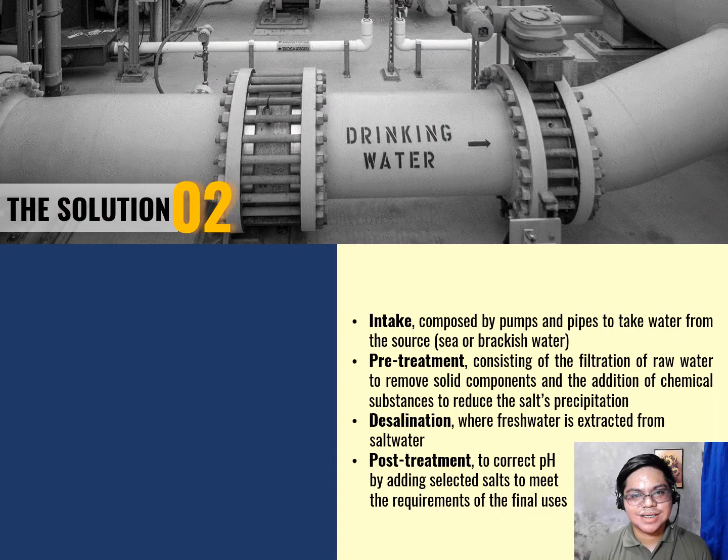Accepting this reality, unconventional water technology, primarily seawater desalination, has been declared to support the United Nations Sustainable Development Goals, particularly Goal 6, which is about ensuring availability and sustainable management of water resources and sanitation for all. In this light, desalination is a reliable solution to the shortage of potable water that is happening across the globe.

Seawater, which is highly saline, has a salt concentration of 35 grams per liter, which is not suitable for drinking purposes and a wide array of other uses. So the increase in the demand for potable water and the shortage of surface water led to the development of these desalination technologies to obtain fresh water from seawater, or brackish water, which can also be a water source.

Okay. Denotatively, desalination describes any process that removes excess salt and other minerals from water. A desalination plant normally includes first the intake, which is composed of pumps and pipes to take water from the source. Again, sources could be seawater or brackish water. And then the pre-treatment processes. We have conventional pretreatment processes, and we also have more modern technologies for pretreatment.

So for the conventional type, we have coagulation, flocculation, and such. And for the modern type, we now have an emerging membrane-based technology, which I will be further discussing in the latter part of this presentation. But all these pre-treatment processes aim to remove solid components, and we'll also be adding some chemicals in order to hinder salt precipitation.

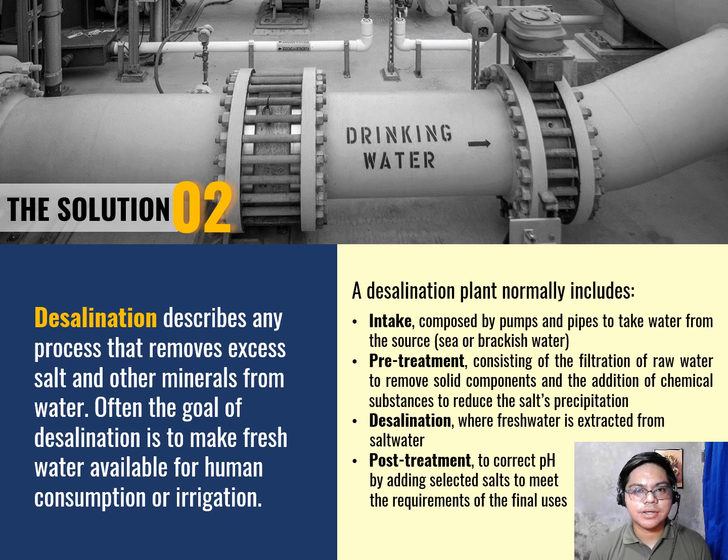Well, historically, the idea behind the desalination process was introduced by the Royal Navy in the 18th century, with the purpose of increasing navigational autonomy without storing more water on the ships. It was then in 1907 that a Dutch company installed the first desalination plant in the Arabian Gulf countries, particularly in the city of Jeddah. Soon after, in 1953, other desalination plants were installed in Qatar and Kuwait.

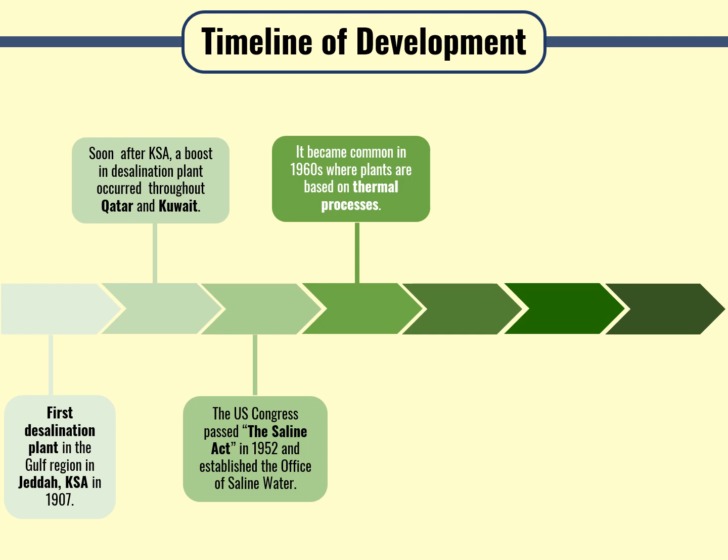It was then in 1952 that the United States of America took steps toward adopting desalination technology as the U.S. Congress passed the Saline Act and established the Office of Saline Water. It became common in the 1960s for desalination plants to be based on thermal processes. The first membrane reverse osmosis technology was realized in 1959, whereas the first pilot plant was installed in 1965 with a capacity of 19 cubic meters per day.

So the first desalination plant based on RO or reverse osmosis technology was installed in 1977 in the United States of America with a capacity of 11,350 cubic meters per day. Great technological progress occurred in reverse osmosis owing to the increase in membrane lifespan and energy efficiency. So nowadays, reverse osmosis is considered the most widely used or most commercialized desalination technology around the world.

Soon after the advancement of desalination technology in the Gulf countries and in the United States, the Asia Pacific region also took steps in adopting this technology. It is said that the Asia Pacific desalination market grew further in 2017 to 2018 as the Chinese desalination sector joined the Gulf desalination sector. And based on their progress report, they intend to build many new plants before 2025.

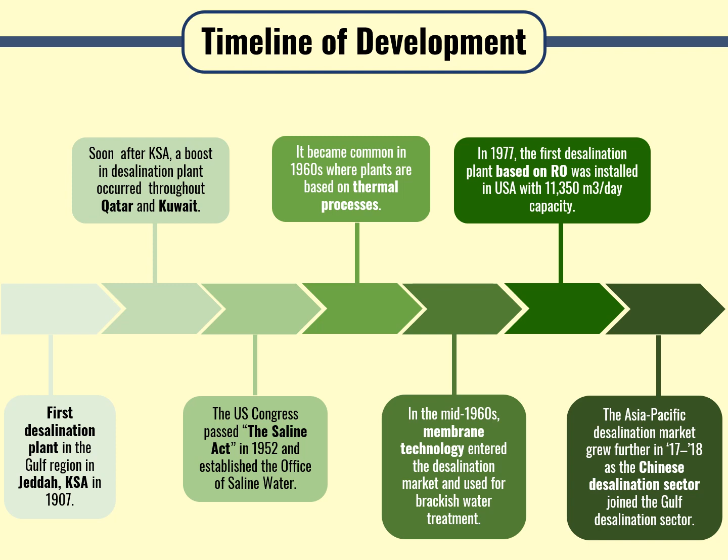So here are the classifications of desalination technologies. We have evaporation and condensation, filtration, and crystallization. So these are the major classifications, okay? But first, let's focus on the evaporation and condensation.

So it is said that evaporation and condensation desalination technologies are the first desalination technologies being installed or being introduced and used for civil freshwater production. So we have two types, the mechanical process based and thermal process based.

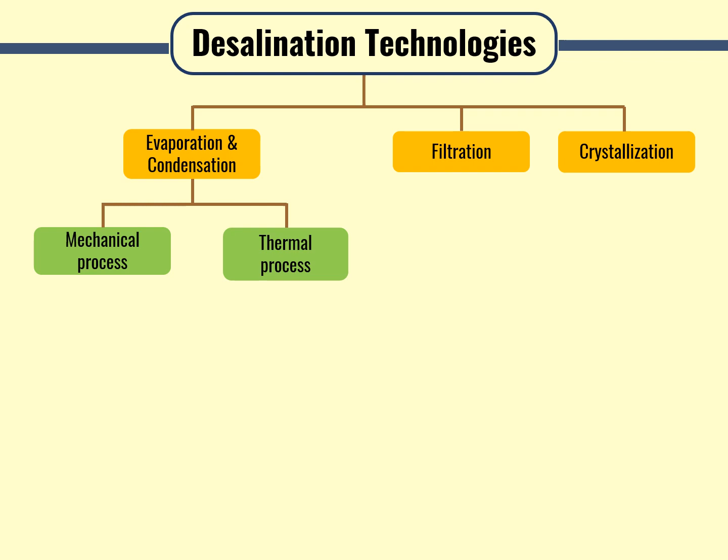Under thermal process, the most common ones are the multi-effect distillation, multi-stage flash, thermal vapor compression or TVC, while others are considered as emerging technologies, which are the solar still distillation, the humidification-dehumidification desalination technology, and the SC or the solar chimney. The mechanical process is the mechanical vapor compression, which is based on the production of fresh water using evaporation and condensation of seawater.

Well, generally, this evaporation and condensation technology is based on the idea. Well, the idea is to supply thermal energy to seawater, producing a vapor, and then condense it. Okay. Now let's move forward to filtration process.

So here are the common filtration processes. The first one is reverse osmosis. While in this context, reverse osmosis is considered to be the most widely used desalination technology. And then we have other emerging technology, which are the forward osmosis, nanofiltration, ion exchange resin, membrane distillation, electrodialysis, and the CDI, or the capacitive deionization technology.

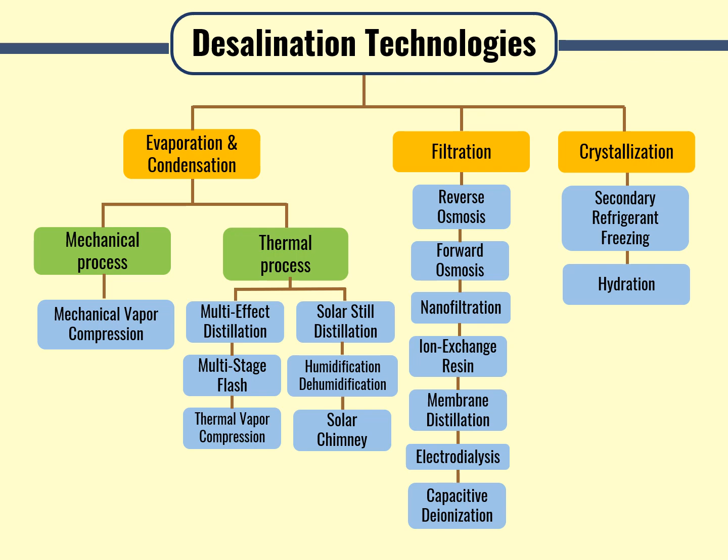Now, I would like to share with you this desalination situationer, focusing on the statistics on this desalination technology and its current status. According to a recent report published by the International Desalination Association or IDA, as of February 2020, almost 21,000 desalination plants are either constructed or contracted to be constructed, and the global installed and cumulative freshwater production stood at 97.2 million cubic meter per day and 114.9 million cubic meter per day, respectively.

According to another report published by the IDA and Global Water Intelligence or GWI in 2019, the seawater desalination market experienced its most dynamic year since the late 2000s. Based on facts released by both IDA and GWI, at present, about 1% of the world's freshwater comes from desalination methods, where more than 300 million people, or about 4% of the global population, rely fully or partially on this source to fulfill their daily water needs.

Now, I would like to highlight reverse osmosis or RO as the leading desalination technology worldwide. Reverse osmosis is a cross-flow filtration method whereby contaminants are not caught within the filter itself. In reverse osmosis, feed water is demineralized or deionized by applying pressure to push it through a semi-permeable membrane, leaving the salt on the other side.

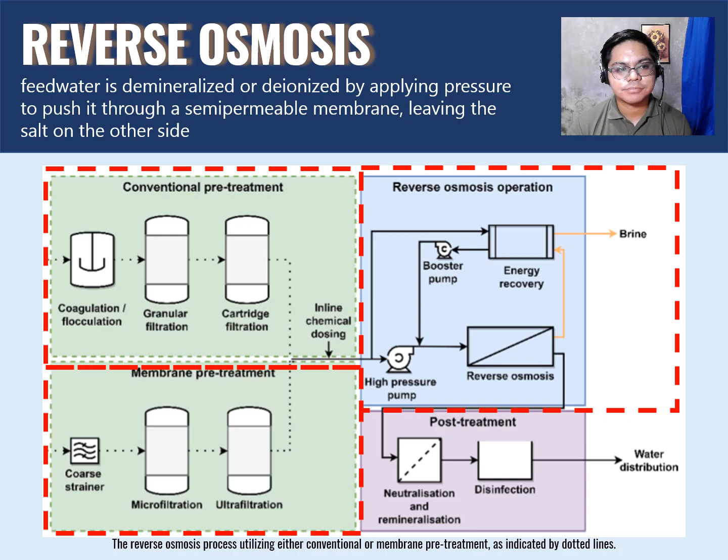And then the waste brine from the reverse osmosis operation serves as an effluent, which will then be sent back into the ocean. Reverse osmosis offers significant advantages over conventional desalination technologies, including high production capacity, lower operating costs, and smaller internals, resulting in more compact equipment. It is providing reliably clean, potable water for millions of people whose lives depend on it.

The RO process can remove up to 99% of the dissolved particles such as salts, colloids, organics, and bacteria from the feed water. These RO membranes reject these contaminants based on their sizes and weights, where typically any contaminant with a molecular weight of greater than 200 atomic mass units is expected to be rejected by the RO system.

In terms of efficiency, the permeate or the fresh water produced using the RO method varies between 30% to 60% of the feed water, depending on the membrane technology used and other factors such as the osmotic pressure that is being applied. Overall, reverse osmosis is a highly scalable process suitable for a range of systems, from smaller plants to systems with a production capacity as large as 600,000 cubic meters per day.

Now, here are the disadvantages. The use and cost of reverse osmosis have been a trade-off between low operational cost in terms of energy versus high associated capital cost, that is, installation and replacement of membranes. Recent technological developments are helping to increase the membrane life, along with better feed water pre-treatment methods and understanding of how to operate and handle the membranes, also helping to reduce the maintenance costs of reverse osmosis facilities.

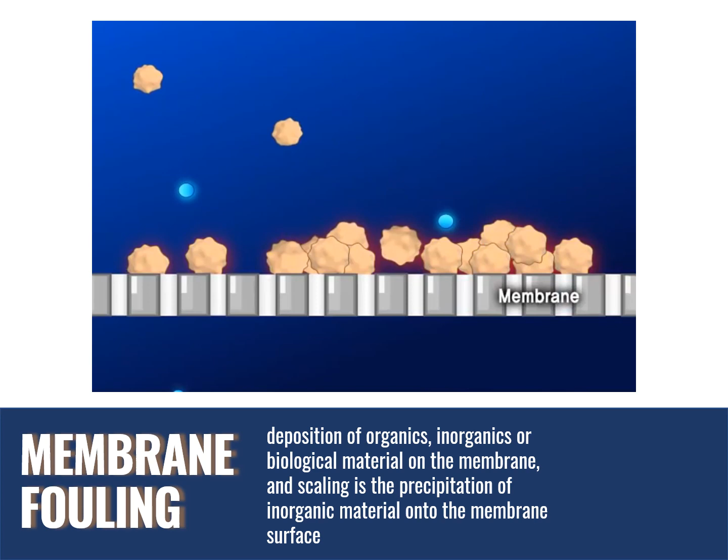Also, one of the drawbacks of reverse osmosis technology is its energy consumption. It is said that RO technology is energy intensive. 71% of the total desalination electricity is consumed by the RO process, 11% by pretreatment, and the rest is used for seawater collection, distribution, and ancillary facilities. But the energy consumption of the RO process has decreased significantly over the past decades owing to improvements in the process.

However, there is a shift in the pretreatment process: conventional processes are coagulation, flocculation, and such, and now we're shifting towards the use of membrane-based pretreatment processes such as microfiltration and ultrafiltration. And these actually have higher energy consumption.

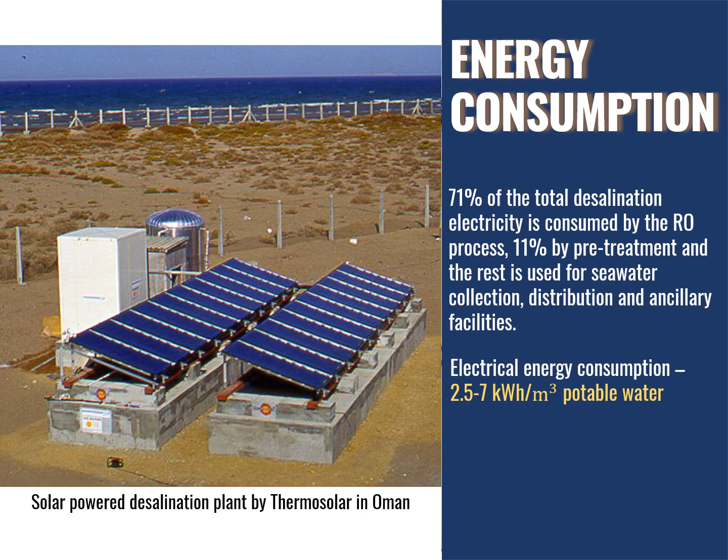Another drawback is waste brine. Elimination of RO brine is one of the key challenges in preventing water contamination from desalination. The water recovery in most seawater RO plants is limited to between 30% and 60% of the feed water, and beyond this range, the required energy for separation increases exponentially. This dependency between water recovery and energy means that zero liquid discharge systems, which recover 100% of pure water, are hard to achieve with RO alone, and thus waste brine is produced.

There is this study by Jones et al. in 2019 that estimated that the actual global brine production was about 50% higher than previous estimates. This means that the water recovery of RO plants sits at the lower range of the previously mentioned 30 to 60% recovery. Thus, RO plants produce around 2 cubic meters of concentrated brine for every 1 cubic meter of treated water. And unfortunately, globally, over 90% of seawater plants discharge brine directly into open water bodies.

So now there is an increased public awareness and a growing number of studies demonstrating the adverse impacts of brine on marine life due to increased salinity. These studies have led to further restrictions on the disposal and treatment of brine, which is expected to draw motivations for further developments of alternative methods.

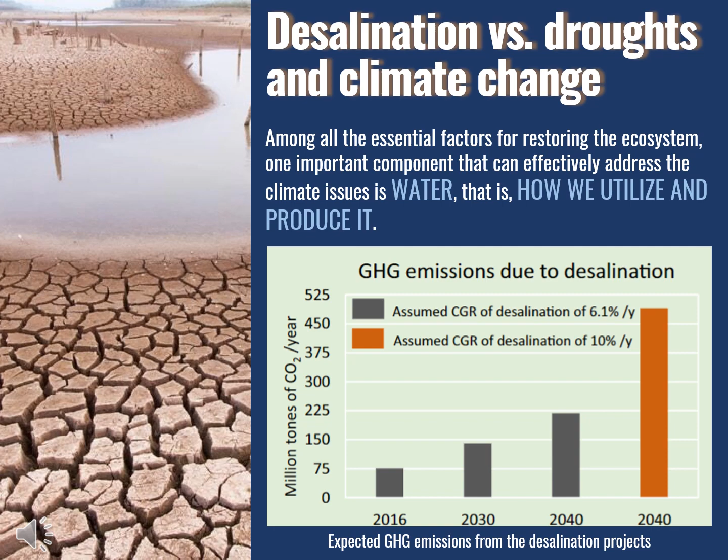If we combine all the effects of desalination, the amount of released greenhouse gases such as carbon dioxide, methane, and nitrous oxide rise higher than the annual average over the past 10 years. Carbon dioxide levels will reach 413.2 ppm in the atmosphere in 2020, which is 149% of the pre-industrial level. So imagine the impacts of this desalination technology.

Consequently, this fuels climate issues, ultimately destabilizing the existing limited freshwater resources as the wet regions of the world get wetter and the dry areas get drier. And all these processes are happening faster than previously thought.

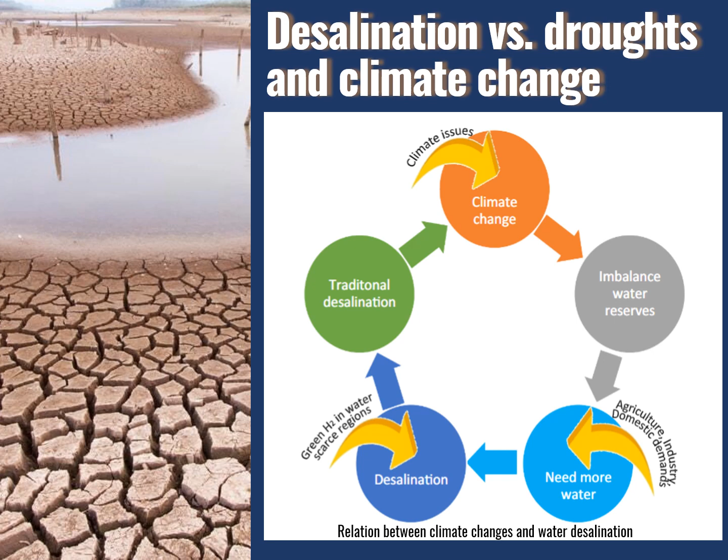Whenever we talk about the potential drawbacks of desalination, mostly environmental issues are raised. However, some serious health issues are also linked with the water produced using this process. Unlike water found in natural resources, water produced through this procedure is low in minerals and slightly acidic. The presence, absence, or even imbalanced occurrence of these beneficial ions can affect human health when continuously used over long periods.

We may know that seawater is rich in calcium, sodium, and chloride, but low in other essential ions such as zinc, copper, and manganese. As we may also know, the ocean is so large and wide that it may contain many toxic substances, microorganisms, and solid particles, such as raw and refined petroleum elements. Along with these materials, there could also be various byproducts of the chemicals used in desalination that can also pass into the produced water to affect the person who drinks it.

Although we do have post-treatment processes being applied to desalinated water to stabilize some of these ions, providing balanced dietary components targeting a varied population such as children, aged people, and pregnant women is a complex task. Due to the continuously increasing role of desalination to quench our thirst, the World Health Organization has already provided guidelines that declare that regular consumption of reverse osmosis water can create some health side effects.

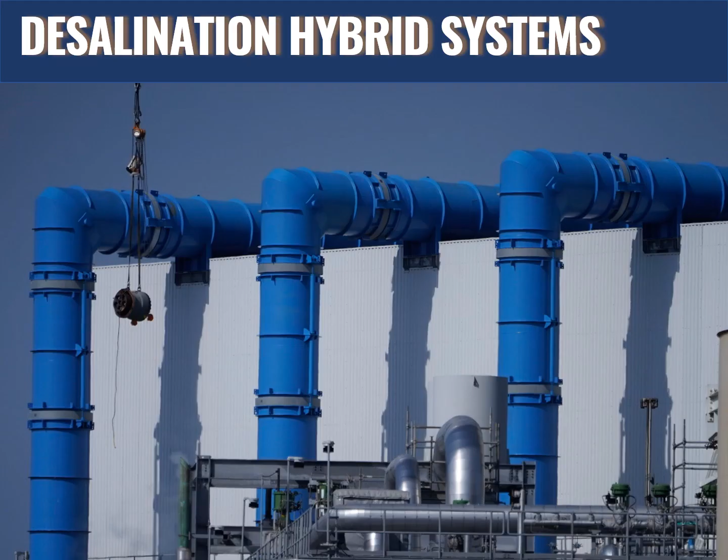So, with thousands of reverse osmosis desalination plants currently operating and with no current plans yet for deployment of large-scale plants utilizing alternative methods, meaning methods aside from RO, it could be a long time before the desalination industry replaces RO. Therefore, hybrid systems can be an excellent opportunity to test, further develop, and grow confidence in these new systems. Here is a comparison of standalone and hybrid systems in terms of five criteria.

We have low energy consumption, low water costs, high water recovery, ease of pretreatment, and ease of integrating renewable energy. So the comparison is based on a scale of 0 to 1, where values closer to 1 or unity are preferred, and all the criteria are considered to be of equal importance.

So here, on this basis, the ROFO or reverse osmosis forward osmosis hybrid system is considered to be the best option as the only alternative with two of the criteria equal to unity, that is low energy consumption and ease of pretreatment. It also has the second lowest water costs. And next to ROFO is the ROMD or the reverse osmosis membrane distillation hybrid system with the highest water recovery.

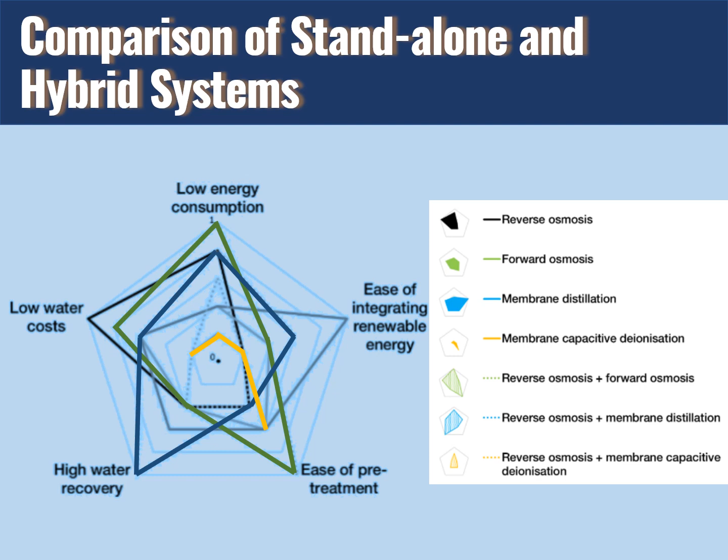I would also like to highlight one of the emerging technologies, which is the CDI, or capacitive deionization. Although CDI was already introduced in the 1960s, it's the lack of large-scale energy-efficient plants utilizing CDI that reflects its status as an emerging technology. CDI, which is based on the electrosorption of ions by porous electrodes, is an emerging technology suitable for brackish water desalination. Using the CDI process, salt minerals are removed by applying an electrical potential difference to saline water over two electrodes.

So although based on current developments, CDI cannot compete with the commercialized reverse osmosis based technology on both energy consumption and capital costs, it can be good as a post-treatment process. There are experiments which found that permeate produced after the first pass of a seawater reverse osmosis plant, treated by CDI instead of applying the second pass of the RO system, was drinkable or potable. And this is also my line of interest now for my thesis topic. So let's see how we're going to unravel or have new findings on this technology.

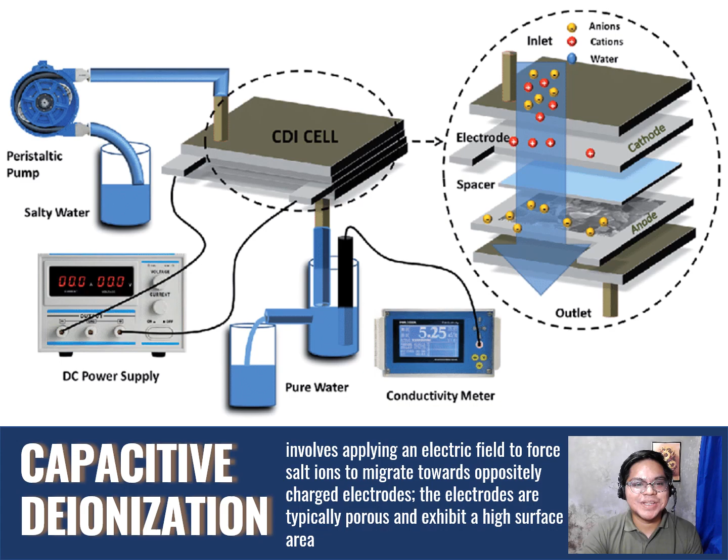The Earth's water resources are in a sad state after decades of mismanagement, while extreme environmental changes are hastening their decline. Surely the world needs to diversify its freshwater sources, and for this, we need to have more tools in our toolkit. In the current scenario, desalination is considered a sustainable solution to water scarcity due to its capability for using unusable and vastly available seawater or brackish water. But there are significant issues such as energy requirements and severe impacts on the environment, which are major hurdles currently preventing its success.

Hence, more research is required, particularly to address the following concerns. One, the appropriate location and the consideration of the environmental impacts in the pre-design phase of the plant can make the process occur without leaving significant harm to the surrounding environment, while scientific approaches, especially those utilizing recent technologies, can be really helpful. Two, focusing on the growth of desalination, not only do we need energy efficient desalination procedures, but also innovative solutions for sustainable energy production. For this purpose, we can enhance the energy recovery method, which can be really vital to achieve this goal.